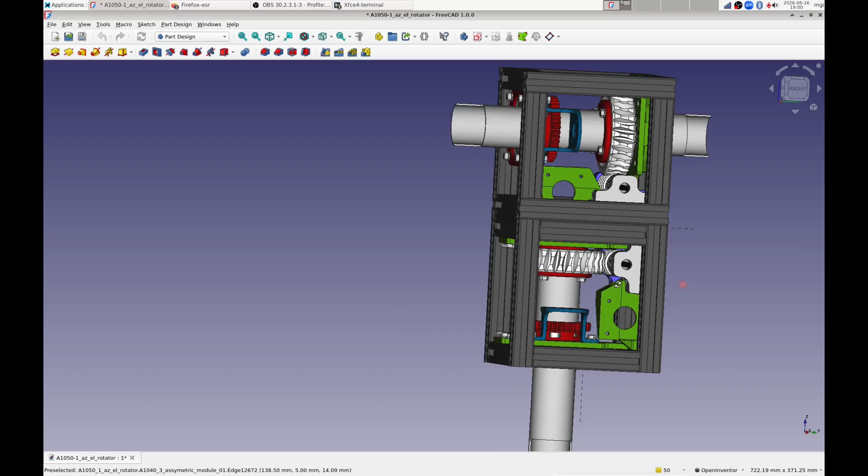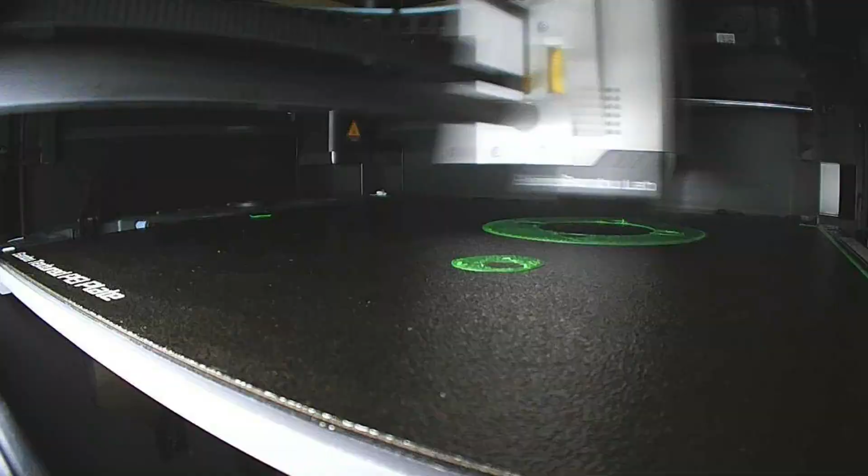I am building an antenna rotator, and one of the key parts is a worm screw that gears down the stepper motor and prevents backdriving from wind loads. The SatNOGS plan recommends the SLM process, but I wanted to see whether I could simply 3D print a functional version on an FDM machine.

The challenge is the geometry. The thread profile creates a 70-degree overhang that extends for about 6 mm. In CAD it looks perfect, in the slicer it looks perfect, but the real question is, can you actually print it? Let me know in the comments how you would tackle this. I tried 6 different approaches.

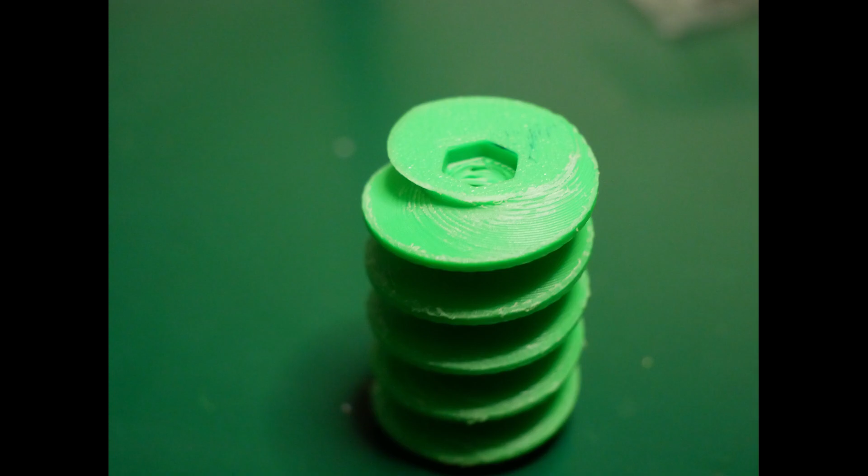PLA without support produced droops and burrs on the underside of the thread. Scraping and sanding is unpleasant because the PLA gums up sandpaper and is hard to cut cleanly. The part is serviceable, but PLA simply isn't suitable for outdoor use, especially during a Texas summer.

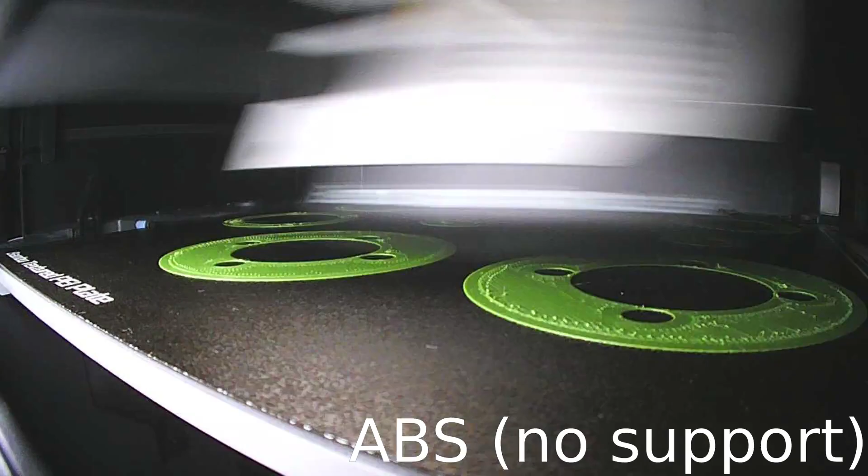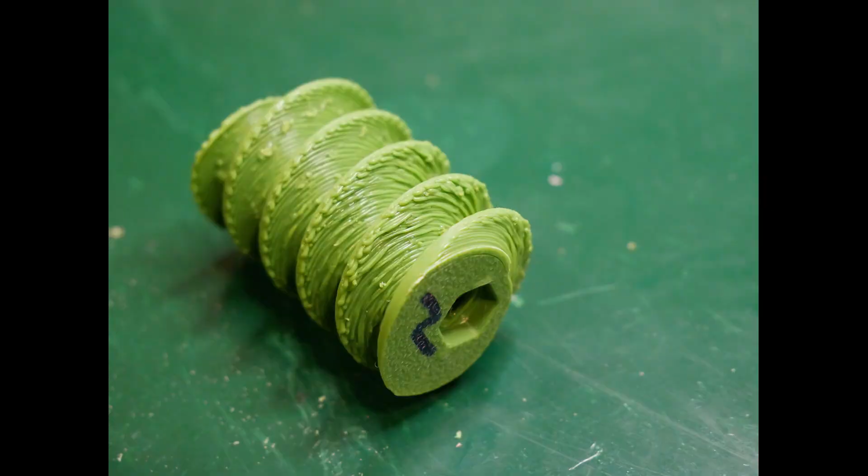ABS printed cleanly, but the unsupported edge developed a rope-like texture and the down-facing thread surface is ugly. Despite deburring and filing, the part remains ugly looking, but it is fully functional.

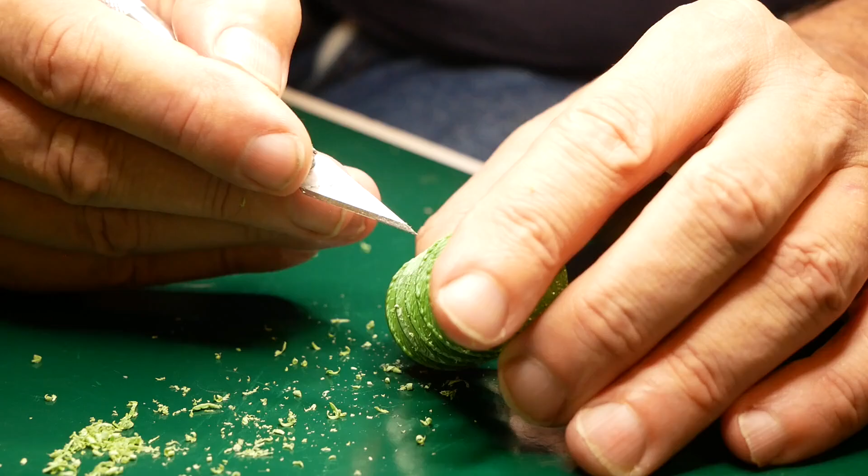Tree-supported ABS prints easily, but removing the support structure is tedious. The underside of the threads is still rough and needs a lot of cleanup. The final part still looks bad, but it is working very well.

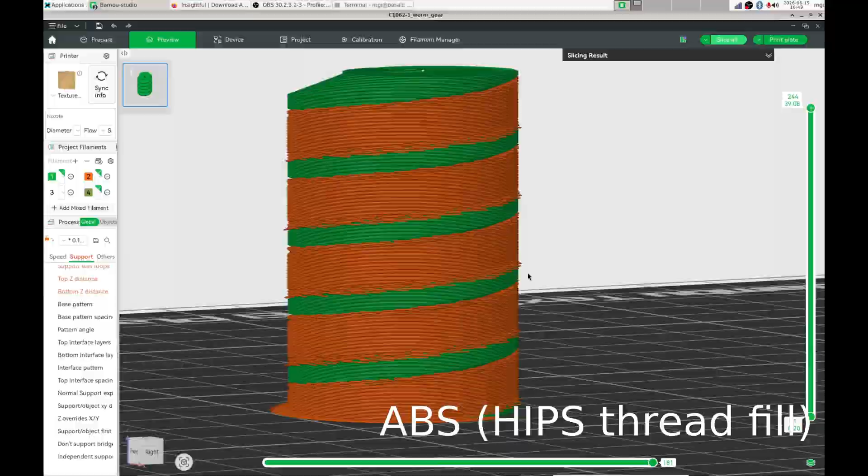High-impact polystyrene, or HIPS, is a perfect support material for ABS because the two plastics don't bond. In this approach, I will fill the threads with a HIPS spiral that supports the screw. In practice, the HIPS flakes off immediately due to thermal warping. I stopped this print early. It's a failure.

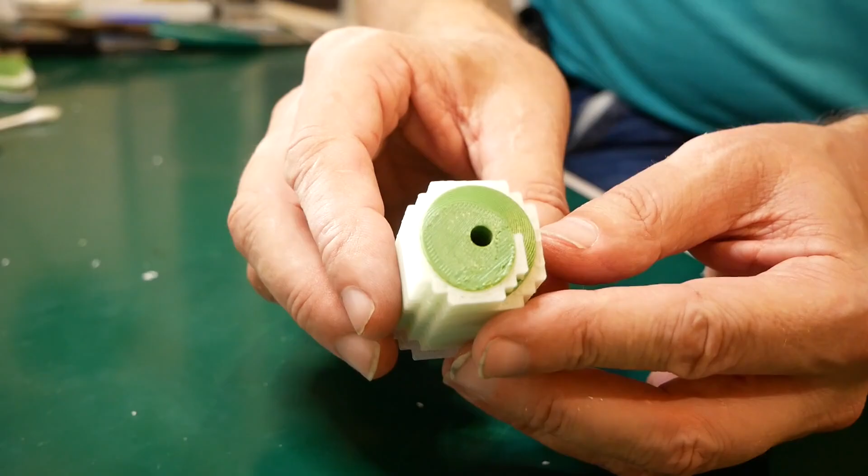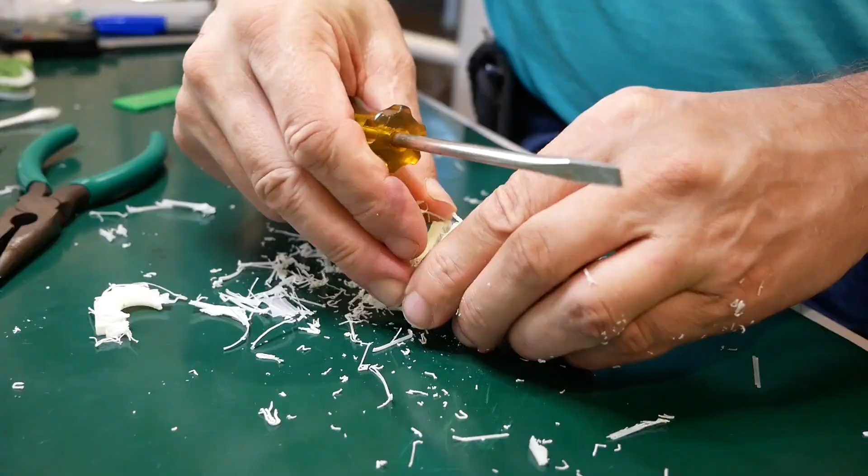Surrounding the screw with a HIPS tower avoids cross-material adhesion issues. Each material supports itself. The print succeeds, but takes a long time due to the constant filament changes. Removing the HIPS scaffold is difficult. The underside of the threads is still unexpectedly lumpy and requires cleanup. Yet the part also meshes worse than the previous ones. And my filament change poop bin overflows with wasted filament.

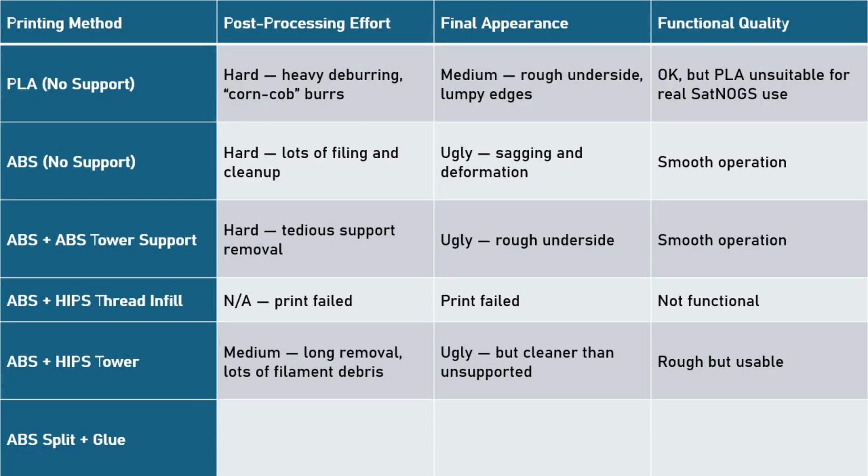Splitting the screw lengthwise avoids support entirely. Printing is easy, but even small warping effects the fit. The halves don't align perfectly during acetone glue-up, and the layer lines increase friction, which affects performance. I am not happy with this method. It doesn't perform well and has a plane of inherent weakness.

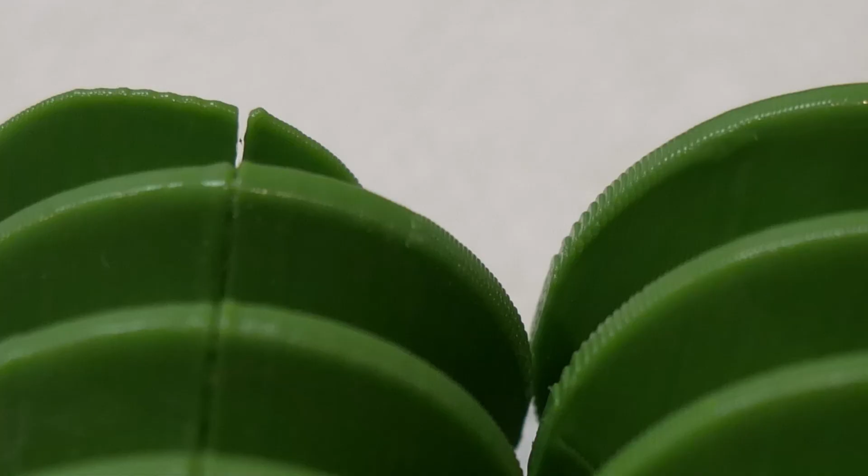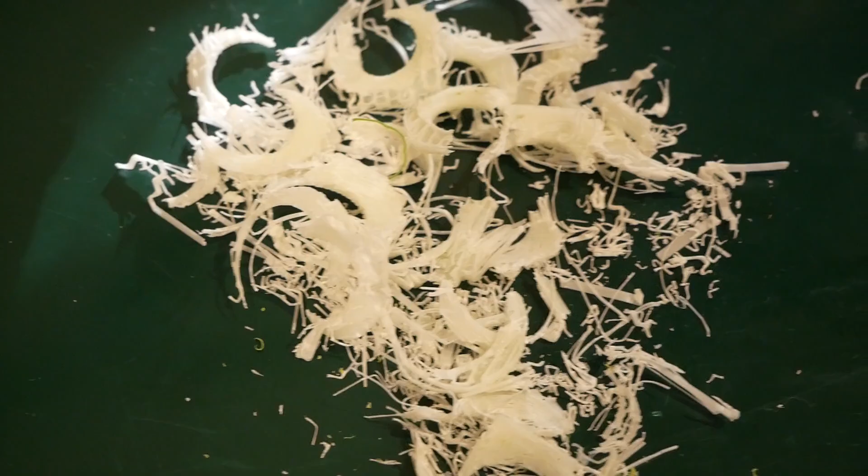I tried smoothing the ABS parts in acetone fumes, but I didn't see meaningful improvements. I deem ABS unsupported and ABS with tower support to be functional. The parts require cleanup and they may look ugly, but they do perform. The HIPS tower works, but it is not worth the time and wasted material. ABS split and glue does not perform very well. I deem these two methods marginal.

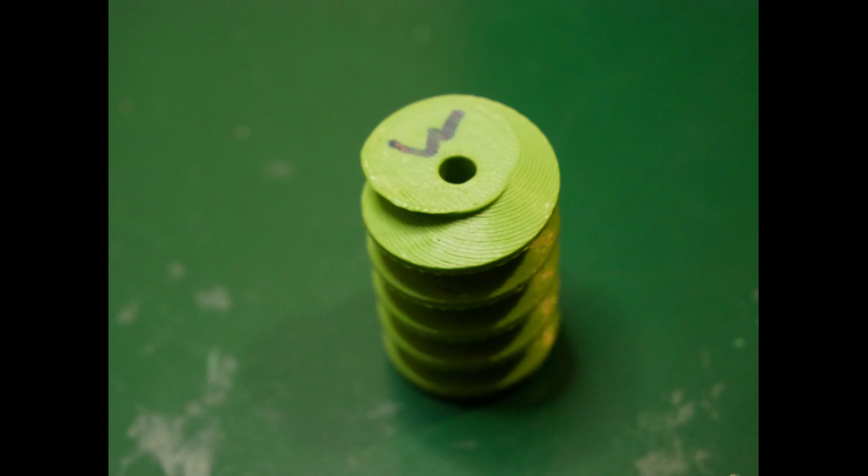Lastly, PLA and the HIPS filled threads are not viable. If I need to print these parts again, I will try tweaking slicer settings. I hope that this will keep the ABS molten long enough to fuse the strands on the unsupported thread underside, without turning them into frozen spaghetti. If you have recommendations for extreme overhangs like this, I'd love to hear them in the comments.

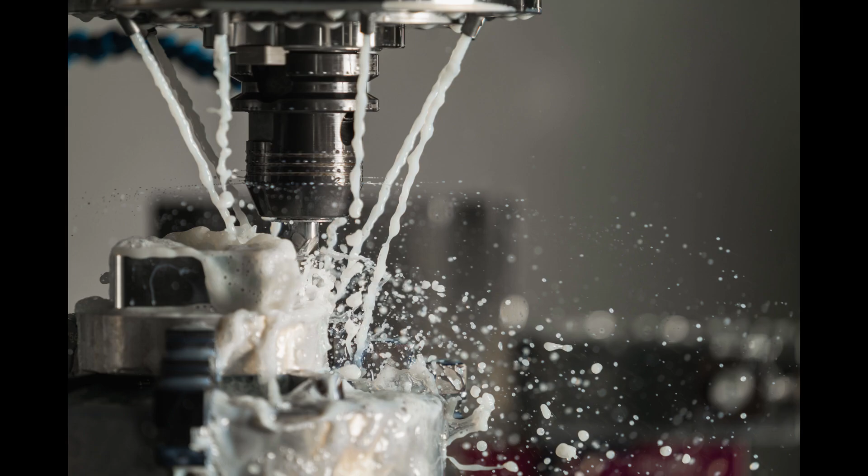If appearance or precision matters to you, make the worm screw from aluminium or bronze on a lathe or a CNC machine, or use the SLA or SLM process as recommended in the original plans. But for my project, the ABS unsupported and ABS tower supported prints are functional, and that's what I will use.